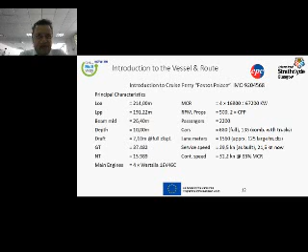Together with her twin sister, Festos Palace belongs to a completely new breed of cruise ferries, I think still holding the title of the fastest displacement cruise ferry ever built. The interior design was done by an Italian studio. The technical characteristics of the vessel are summarized here, with a total length of 214 meters, length between perpendiculars of 191.2 meters, and a beam of 26.4 meters. You can see the depth of 10 meters, draft 7.1, gross tonnage of about 37.5 thousand, and a net tonnage of close to 16,000. The full displacement of this vessel is around 20,000 tons. We're talking about a big vessel.

She is carried for many reasons by the previous model of the 16-cylinder engine of Wärtsilä, and please keep this in mind, because later on, when we come to the retrofit, we will have an explanation of why Wärtsilä is dealing in a different way with this particular engine.

The maximum rating of both engines is more than 67,000 kilowatts, turning two controllable pitch propellers at 500 RPM each. The passenger capacity is 2,200 passengers, and the car capacity is 660 in full configuration, or 155 when we combine the cars with the lorries, with trucks.

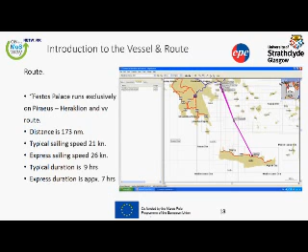Now, let's go to chapter 4, which is the design starting point for the LNG retrofit.

Did I miss a question or something? No? Please try to turn off this camera because we do not have good audio. Okay, shall I continue? Okay.

Design inputs. Let me present to you why those are necessary and of what kind they should be in order for the designer to start proper work. Everybody, I'm sure, can easily understand why some inputs are important for the designer to start. Without them, there is going to be no solid result whatsoever, and any technical solution that comes out of the designer is in danger of being jeopardized during actual implementation. This means that if the designer doesn't have any inputs, he might face a catastrophe, allow me the expression, during implementation.

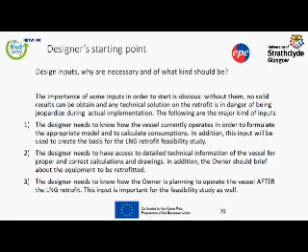For the annual operation vessel's profile, we went to Minoan and we asked the right questions, and they gave us the right answers. And these are recorded herein. As you may see, the vessel operates around 350 days per year, which is a huge amount of annual usage. And indeed, I personally raised the question to Minoan, okay guys, your vessel is close to constantly annual operation.

And the answer that I received was astonishing. We only stop for 2 days for New Year's Eve and Easter Sunday, and we only stop for around 10 days for our annual dry docking. The rest of the year, we are constantly on the route. So, we are talking about a vessel that sails within a very easy line, but sails constantly. And she also performs daily departures from either port. Let's say Monday, Wednesday and Friday from Piraeus, Tuesday, Thursday and Saturday from Heraklion, and again the circulation.

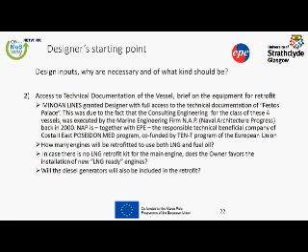I need to highlight to you a trick. What does it mean? It means that if for any reason you cannot obtain access to the technical literature of the vessel that you are studying for LNG, or if the owner is not willing to give you any access, or if the shipyard says, okay, my design is not freely distributed, etc., in order to bypass this difficult case, you can propose to sign an NDA. NDA stands for Non-Disclosure Agreement, an agreement between two parties that will exchange sensitive information, and every party is obliged to follow the rules of the NDA.

I did this particular exercise, and I signed an NDA with Hyundai shipyard regarding another vessel, a car carrier, and I signed this back to back with the owner, of course. The owner said, sorry, although it's my ship, I do not have access to the design because the design is not mine, it belongs to the shipyard. And then Hyundai said, okay, I can grant you access to this design, but please note that all rights belong to me, and let's sign an NDA. This is how we bypassed this difficulty and were able to exchange technical information on the particular vessel. So this is a good trick to keep in mind, that in some cases you may raise the solution of the NDA. The third family of inputs is how the vessel operates after the LNG retrofit.

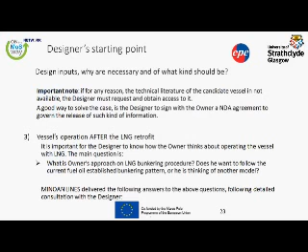So, in all these three families of inputs, Minoan Lines cooperated with us in detail, and they provided the following feedback. How many engines will be retrofitted? Only 2 main engines. This is based on the fact that there is no need whatsoever to retrofit all 4 engines. As I told you before, the ship sails only with 2 engines, and the second pair is in standby mode for maneuvering when entering and leaving the port.

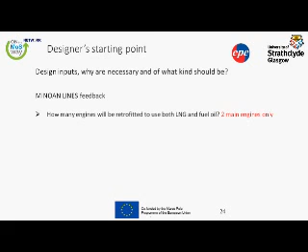Now, it was clearly highlighted to Minoan that we are going to retrofit 1 pair only. This means that Minoan will no longer have the flexibility to exchange the engine pairs in operation. Right now, when they're sailing from Piraeus to Heraklion, they put the first pair of engines in operation, and when sailing from Heraklion to Piraeus, they put on the second pair in order to keep the operating hours in balance. This was clearly explained to them, and they clearly accepted it.

There is no need to consider re-engining the vessel because, as I explained to you, Wärtsilä has a solution for these old engines, and this solution has been communicated to Minoan together with the actual cost. Wärtsilä made an offer, and Minoan said, okay, we can consider this solution, please proceed accordingly.

Regarding the diesel generators, no diesel generator will be considered for LNG retrofit. This means that the diesel generators will continue to operate on marine gas oil or fuel oil, depending on the case.

And what is the owner's approach for the LNG bunkering procedure? Minoan expressed their willingness to keep the bunkering practice and pattern. This means that they would like to see Festos Palace bunkered with LNG once per week in port. And this is critical for us because we needed to take it into consideration for our tank capacity calculations.

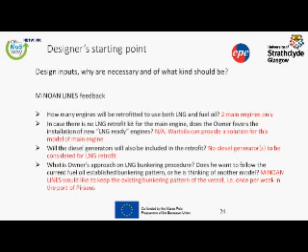So, let's summarize the inputs. We have the full operational vessel profile. We have access to the technical literature, and we have a clear picture of how the vessel will be bunkered with LNG. Based on the above, the starting point has been clearly defined, and we were able to start our first design, that is, to start dimensioning and calculating the capacity based on the Wärtsilä input of LNG consumption for the Wärtsilä 50 engine. Please remember what I told you about the rebuilding of the 46 to 50. So Wärtsilä gave us the consumptions, and we were able to calculate the capacity of the tank.

This means that immediately afterwards we went to the suppliers and said, we need a drawing for a tank, or two or three, with this capacity. Please consult us on which is the best solution. Later on, I will show you the solution.

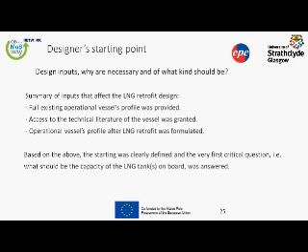After defining the starting point and making the very initial definition, and I repeat, this is the required LNG tank capacity for the specific journey of the vessel, we are now heading towards the next difficult design question: where to place those LNG tanks on board. The critical question here is whether to place them inside or outside. What does inside and outside mean? Very soon I will explain to you. And of course, a full analysis and decision tools should be applied in order to answer this question.

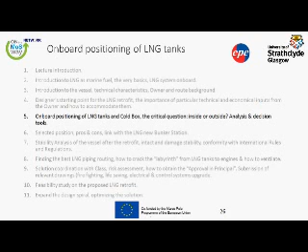Although I'm pretty sure that you are aware of this, let me briefly tell you that the LNG tank does not come alone. It is followed by a number of equipment with, let's say, strange names, for example, cold box. And all this consists of one unit, the purpose of which is to hold and store the LNG after bunkering, and then to be able to distribute it to the engines for consumption.

The typical LNG retrofit equipment includes, of course, tanks, cold box, which is a closed box that contains the regasification equipment. And what does that mean? It means that it is the point where the LNG becomes again NG, natural gas, in order to be brought to the main engine for consumption. The cold box is, of course, all valves, evaporators, relief systems, nitrogen injecting system, everything that is necessary to operate in a completely safe mode.

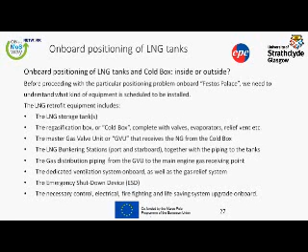Let's press a little in order to bring the full picture. This is a very simple schematic of what we are talking about. We are starting with a bunker station, which is receiving the LNG from an outside source. It might be a truck or it might be a bunker vessel. We don't care for the moment. We are going to see what's happening after the bunker station.

So there is a line that brings the LNG to the LNG type C tank. For the connection, we might use the upper part of the tank for filling. This is the filling up methodology, or in some cases we might fill the tank from below. This is the filling down procedure. In principle, we are using the upper part of the tank.

Then we have the cold box with a dotted line. This is the cold box that contains two evaporators, complete with valves and safety devices, and also the water glycol system that keeps the system under a certain temperature. Don't forget, we're talking about a cryogenic liquid. Minus 160, everything that comes in contact with this liquid suffers cryogenic effects. This means that we need to use a certain means to avoid cryogenic impacts, and glycol is the means to keep the system at a certain temperature. We operate in extreme environments.

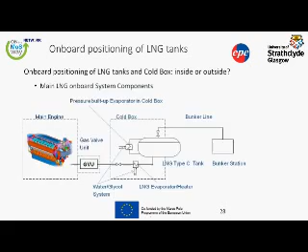Now, a typical tank type C, horizontal cross section, where you can see the outer vessel and the inner vessel and the support. What is interesting regarding the tank of type C is that the IGF code and the class societies are considering this type of tank leakage free. We are talking about a tank that virtually will never face a leakage.

How come? It's because we're talking about a two-skin vessel. We have a vessel here. In between, we have a gap which might be filled with a special foam or perlite. And we have the outer skin as a secondary barrier. It is worth repeating that this type of tank is considered leakage free, and this is the reason that class societies consider the spaces where these tanks are placed as non-hazardous areas. This is important for you to keep in mind.

A typical bunker station: normally, the constructor of the tank also constructs the bunker station, and then this comes on board as a box. We have, of course, the bunker connection to the outside source. We have the vapor return for LNG vapors, and this is for safety. And we have the nitrogen pipe which is used for inerting. I'm sure you saw this bunkering procedure back in Finland last time, so this is familiar to you.

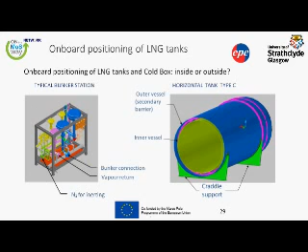The box, more or less, in a picture. The core is this brown box, completely closed, and there are only connections for ingoing circulation. This is, for example, the bunker station. This is the supply, this is the nitrogen supply, this is the cold flare or the relief valve, and this is more or less what you are seeing on board a vessel.

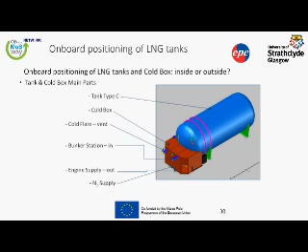There are other types of tanks as well. For example, type B, which is rarely used, and we also have the membrane tanks, which are commonly used on board vessels and in land applications. We're talking about the type C tank because it has a number of pros that are very useful for operations in the restricted areas of ships.

First of all, we have a working pressure above 2 bars. Normally, this tank operates within the range of 6 to 8 bars. Some of them can work at more than 10 bars. So we are talking about a high pressure capability. We have a superior insulation that actually makes them leakage free. We have the boil-off control, which is the proper circulation of the gas.

The design has proved itself. It's a proven and robust design, and there's a very simple installation. It's more of a plug-in case, not as easy as that, but in any case it can be described like that. And of course, the production availability lets you accommodate the production figure into your retrofit schedule with ease.

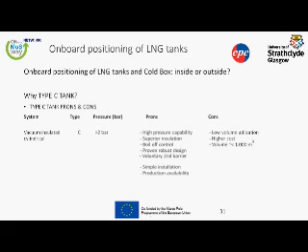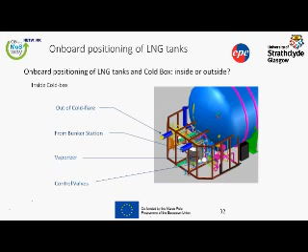More interesting discussion. Flow diagram. Flow diagram is essential because it gives the designer the view of the system to be installed. It gives a snapshot of what's going on board the vessel once the LNG equipment will be in place.

Before, we're talking about the bunker station complex, which includes supply, the control valves, and the transportation pipeline towards the tank. Talking about the Type C tank with all the necessary connections. We're talking about the cold box or the regasification system.

You can see here, for example, the two lines I mentioned before. This is the output line that goes to the main, and this is the line that returns gas into the tank in order to keep the pressure.

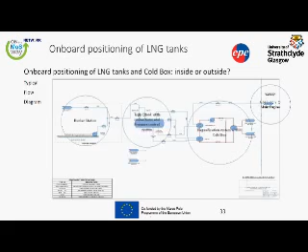Go back to the critical question, where to place the LNG tank and the other equipment, inside or outside. A very quick clarification. The cold box should be by the tank. You cannot, for example, install a tank in position A and install the cold box in position B, which is 50 meters away. This cannot work.

In optimum conditions, the cold box should be next to the tank, collided, allow me the expression, with the tank. It is permitted to move the cold box a few meters from the tank, but not further. You cannot have a great distance between the two components.

So, coming back to the question, inside or outside, as you may understand, we do have a straightforward answer in case there is no space. For example, we don't have inner space and we don't have outer space. If we don't have any space, then sorry, but the design is finished. Your ship is very small or doesn't have any space, and please do not consider this vessel for LNG retrofit.

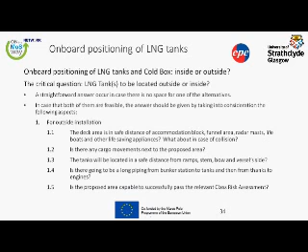We talked already about the pre-cooling, and no need to go further than that. But pre-cooling should be written in your minds with capital letters. It might destroy the whole operation if not properly studied and addressed.

You should ask yourself regarding the outside positioning if the ship operates under extreme environmental conditions. For example, if a vessel constantly sails in areas where the air temperature is high as a yearly average, then at least raise this question to the system provider, and you should notify him by telling, okay guys, I have a ship that constantly operates in heat.

Is there anything that should be notified? Is there something that I need to tell the owner? Any precautions to be undertaken? And if the supplier says, oh, no worries, my tanks can withstand 60 degrees, then of course you will request this in writing and everybody will be happy.

The eighth question deals with stability. It's a common question. As you all are aware, the higher we place weights on board, the worse the stability is affected. You should always check the stability of the vessel carefully if we are going to install LNG tanks outside. Of course, you should also consider the structural integrity and capacity of the area to receive those tanks.

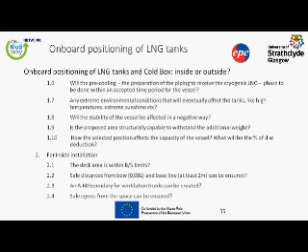Again, the structural reinforcement and the structural status of the area in question should be investigated. The risk assessment, again, stability, again. And now comes the other question: how are we going to bring those tanks on board? Do not underestimate this topic. It might be very difficult to bring tanks to inside areas of a vessel.